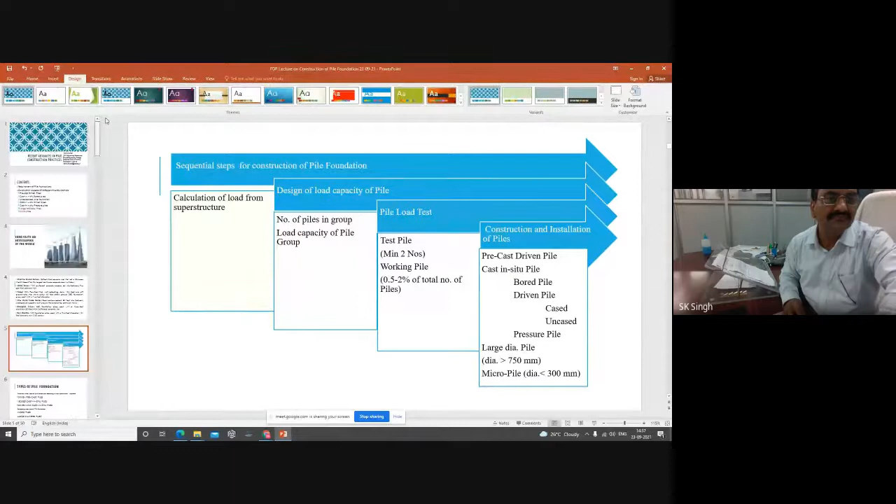Is it visible to you? Is the screen visible? Yes sir, visible sir. Okay, so am I audible and visible?

Yes sir, both. Okay, so we have to start a very interesting topic, that is the recent advances in pile construction practices.

So for this, during this presentation, I will deliver regarding the requirement of the pile foundation, and mainly we will focus on the construction aspect of the different pile foundations.

There are, as you know, different types of pile foundations: precast driven pile, cast in situ bored pile, under-reamed pile foundation, cast in situ driven pile, cast in situ pressure pile, and two more types of pile - large diameter pile and micro pile. These are the recent advances.

Mostly nowadays we are using the large diameter pile.

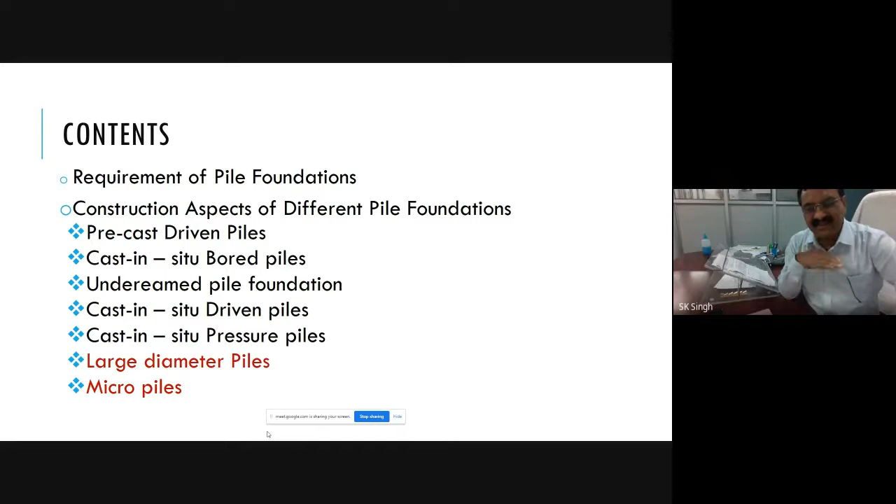In addition to the conventional pile, we will first go through the conventional pile, then focus on the large diameter pile and the micro pile, which are nowadays being extensively used in practice. So these are the recent advances in construction technology of pile - either we are using too large a diameter pile, or too small, which we call the micro pile.

So now why is that the requirement? Because if we talk about the construction of buildings, the height of the building is going on increasing.

So as the structure becomes taller and taller, the load on the foundation increases. The more the load on the foundation increases, the load capacity of the foundation member should be very high.

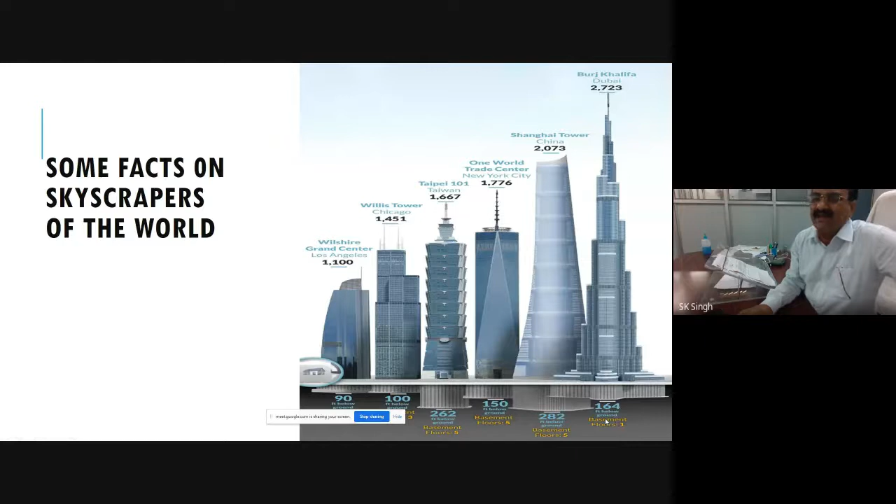So you can see here the dimension of the foundation - the depth of the foundation is 164 feet below the ground for the Burj Khalifa, and the type of foundation provided is the piled raft, meaning a raft foundation supported on piles.

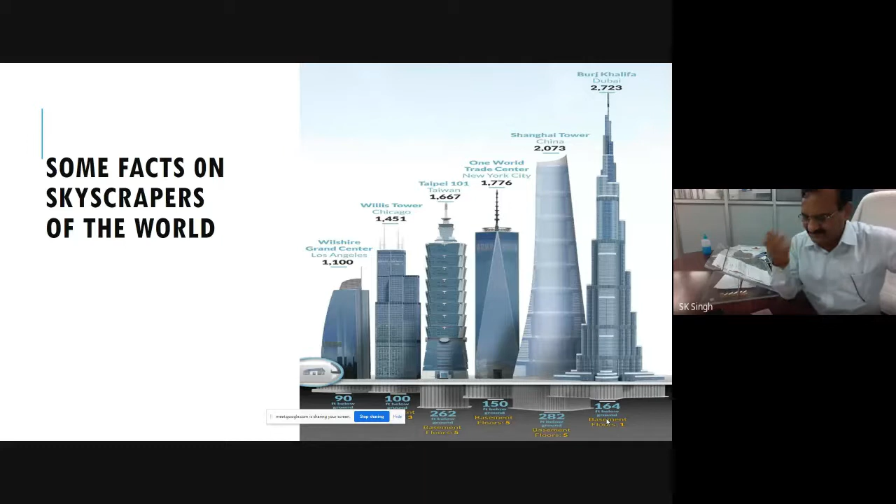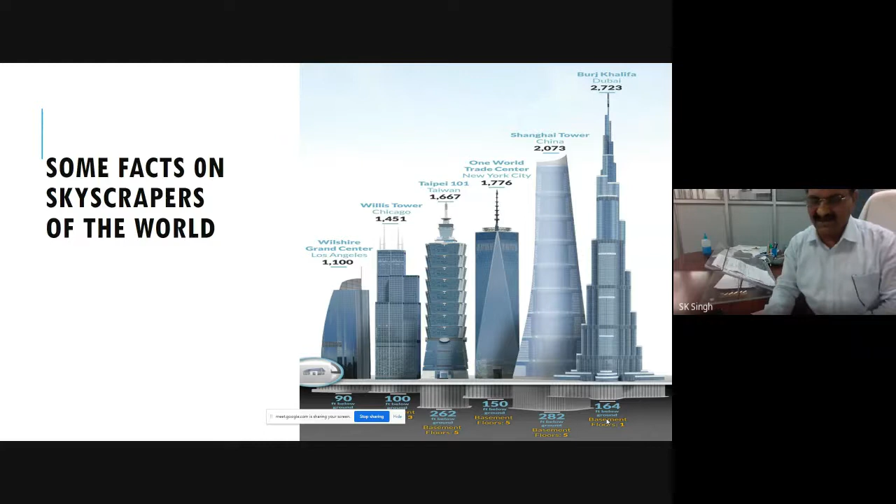Please don't hesitate to make any query or express your concern regarding this lecture. That's why we require a foundation which can take larger and larger loads, that is, large diameter piles are required.

These are some descriptions of skyscrapers. In the Burj Khalifa, which is 160 stories, 192 foundation piles are used, and each pile has a diameter of 5 foot, which is around 1.5 meter dia, with a 12-foot concrete mat, that is the raft foundation. So the raft foundation is supported on the pile foundation, that's why it is called pile raft. All these skyscrapers are supported on pile foundation.

Now what is the sequential construction of the pile foundation? If we have to design the pile foundation, how do we proceed? First, given the superstructure, we have to calculate the load coming from the superstructure. Then accordingly you have to design the load capacity. You have to fix the dia and depth of the pile. Depth of the pile can be fixed from the site investigation report, and the dia of the pile is to be fixed.

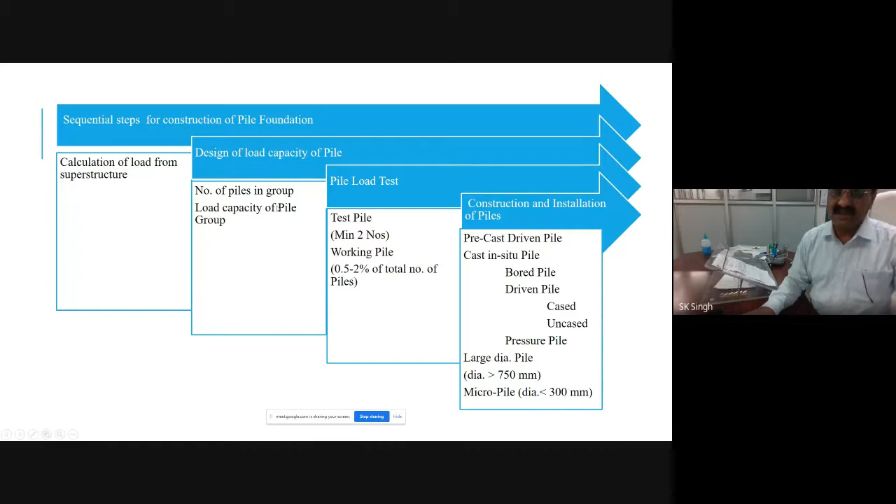Then you have to find out the load capacity of a single pile, using the static formula. Based on that, since you know the total load coming from the superstructure, you could find out the number of piles in a group, and then the load capacity of the pile group considering the interference among the piles.

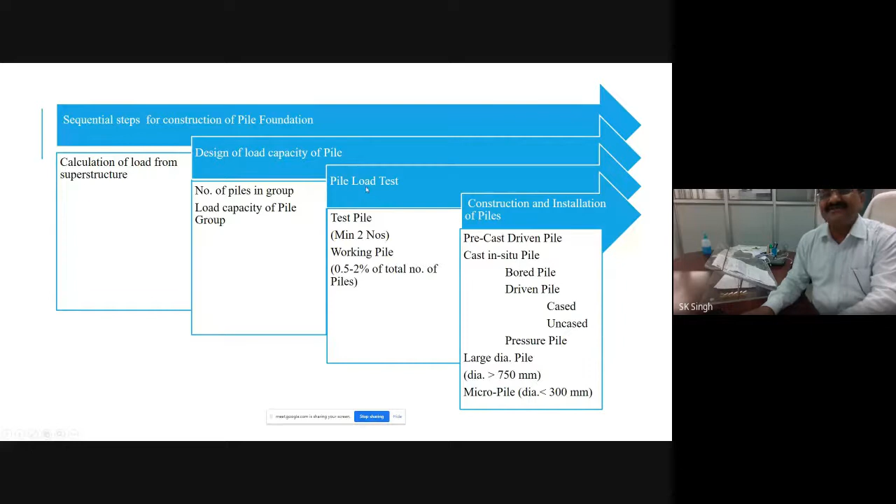That is the theoretical calculation. Since we don't rely solely on theoretical calculation, we do a pile load test before actual installation or construction of the pile in the field. There are two types of tests. One is called the initial test, conducted on the test pile. A minimum of 2 initial pile load tests should be carried out, and if that shows good agreement between the theoretical load capacity and the pile load test result, then you can go for actual construction of the pile.

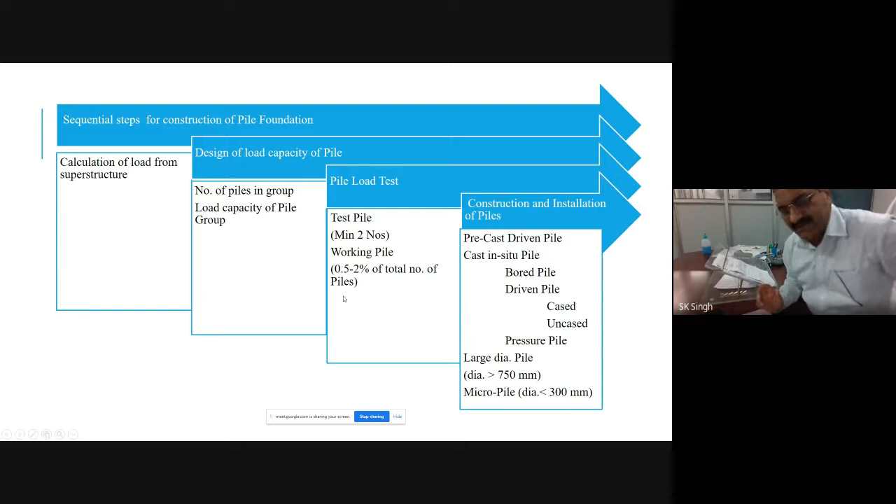In between, when construction of the pile has started, you have to do routine tests on the working pile. This routine test on the working pile may vary from 0.5 to 2% of the total number of piles required to be installed at that site.

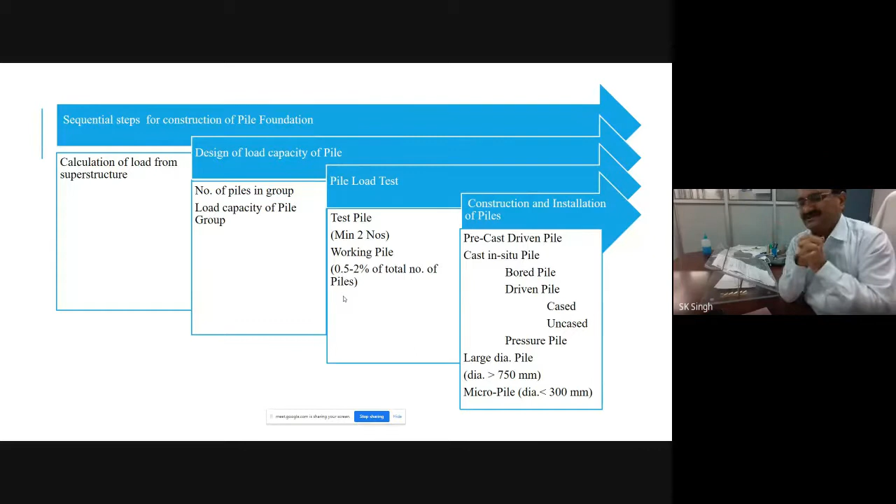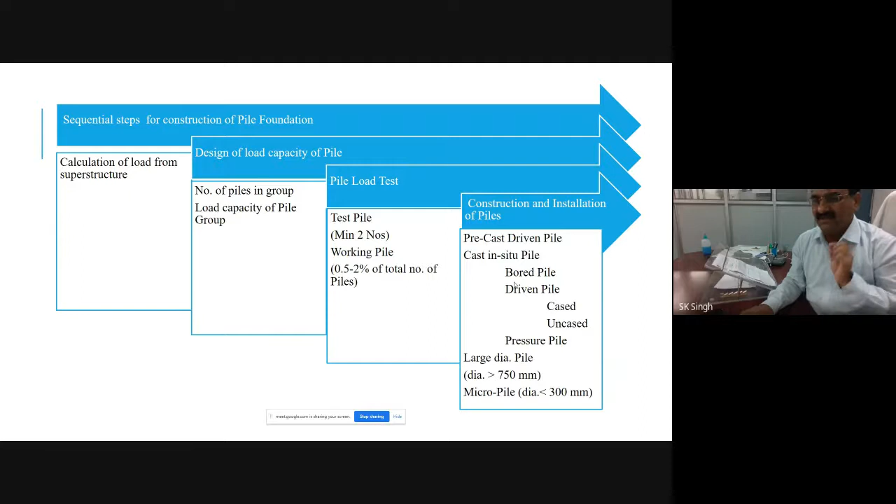So then construction is to be started, and construction is very important, because if your design is all right and your tests qualified the theoretical result, then if you maintain proper quality control during construction, it will take the required design load. But if there are variables in pile construction and good practices are not followed, the load capacity may get reduced, and the pile could not provide the support for which it was supposed to be designed.

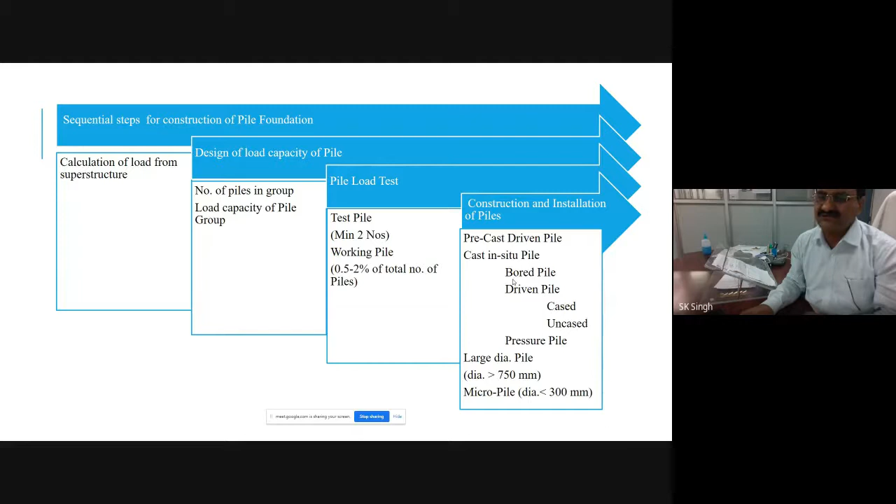So the construction aspects of the pile are very important, and that's why in between we check this load test on the working pile as a routine test, and these working piles become an integral part of your pile system.

There are different types of pile methods based on the method of construction. General pile types include the precast driven pile and the cast-in-situ pile, which may be a bored pile or cast-in-situ driven pile, cased or uncased. There is the pressure pile, and among these, large dia piles, as we have discussed, are greater than 750 mm, while micro pile is a pile having dia less than 300 mm.

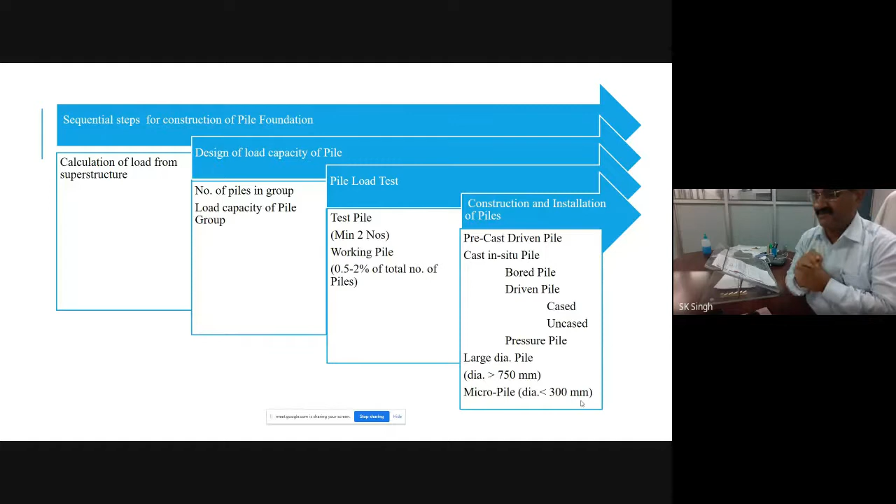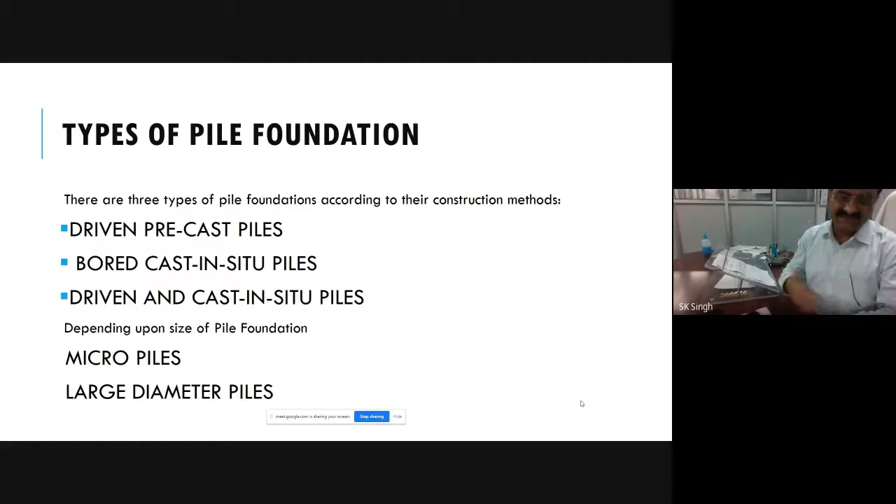Now where can micro piles be used? Micro piles are very thin piles, and they differ from conventional piles in where they can be used. Suppose you have to install a pile at a mountainous terrain where the pile installation machinery cannot be accessible, and heavy machinery cannot arrive at this very rugged terrain. In that case, we use the small dia pile, which requires a very handy type of installation equipment.

Similarly, if there is not sufficient headroom for installation, like the retrofitting of a structure, micro piles can be used because they are easy to install. But the load capacity of the micro pile is comparable to the conventional pile. Though they are very thin, the diameter may vary from 75 mm to 300 mm for the micro pile.

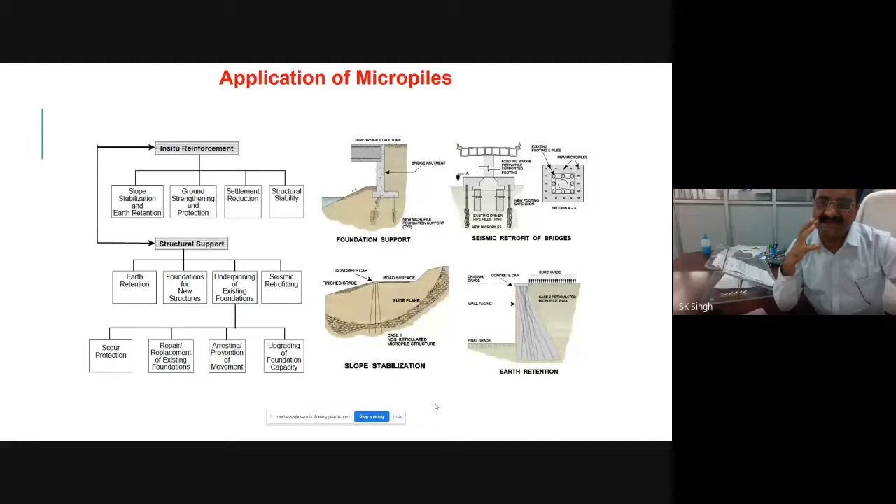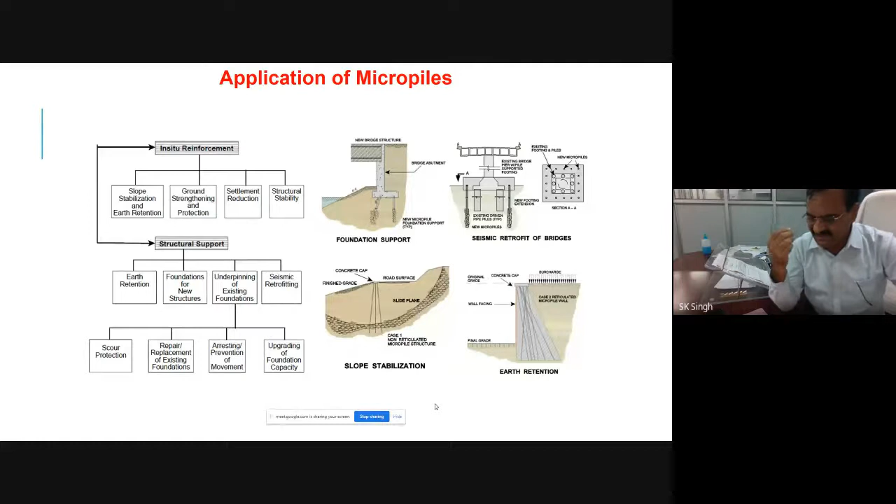If we compare the micro pile with the conventional pile, in the conventional pile we pour concrete under gravity from the tremie pipe. But in the case of the micro pile, grouting is done, and the degree of reinforcement is very high. So even the small dia pile's load capacity is comparable with the conventional pile.

On the contrary, large dia piles are also used. We have seen that it has found use under skyscrapers, because the load on the foundation is increasing due to the exponential increase in the height of buildings. So that's why we use large dia piles to sustain that load.

Now you might have seen the construction of flyovers and road over bridges. Under that, to take the load under the pier, these large dia piles are installed, or it may be in a group of piles. If we talk about river bridges,

where the foundation is to be provided on the erodible bed, earlier the invariable choice was the well foundation. But the construction and sinking of the well was very tedious, because the well foundation is installed through sinking under its own weight. That sinking process is very tedious, and particularly to sink that well foundation in plumb is a very difficult task. Generally there will be tilt and shift in the well foundation, and that is to be rectified during the sinking operation.

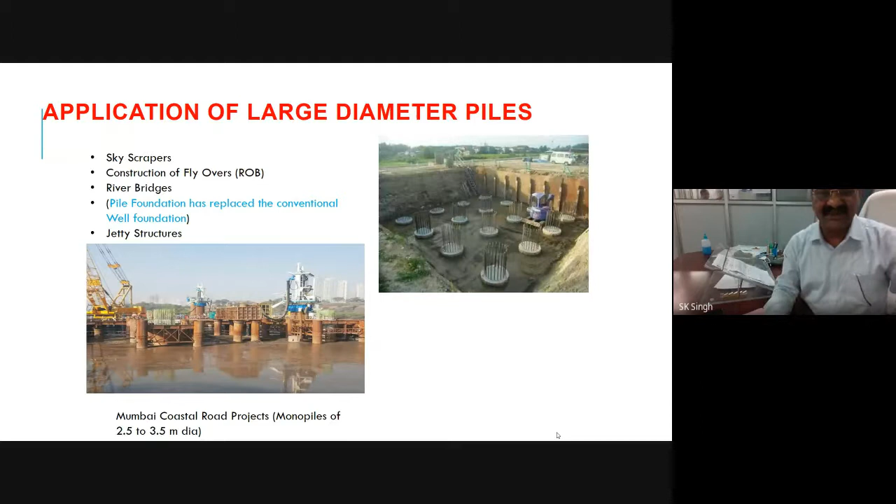So just we are going through the construction process of the different types of pile foundation. First is the pre-cast pile, that is casted or fabricated in some factory shop, and then it is brought to the site, and then it is driven under the impact of the hammer.

Here, one point is that lifting of the precast pile is done from 2 points.

Oh, Rajendra, the sound is coming through. Sorry.

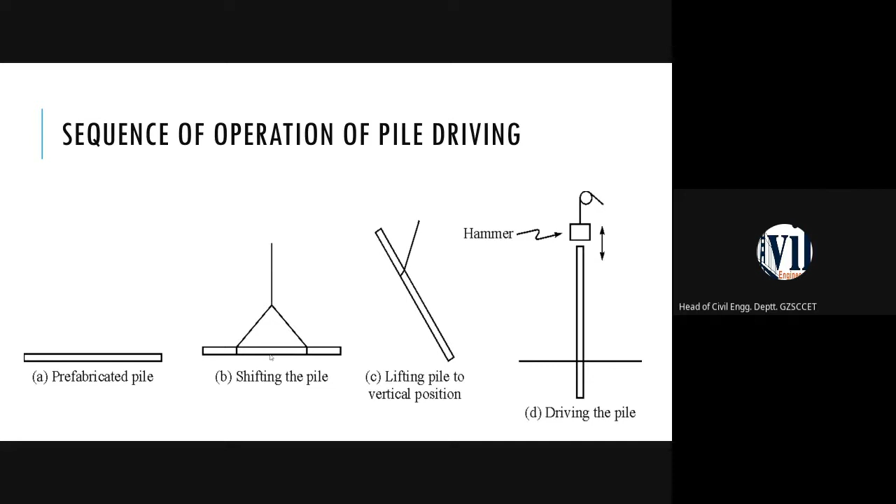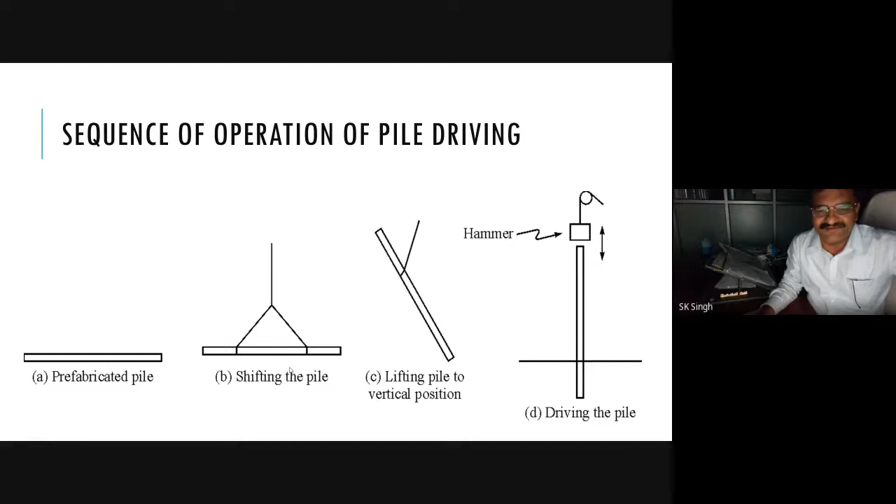No idea, sir. No idea, because... Okay, oh sorry, the light had gone. I'm not able to hear your voice.

0.2 L... point two... 0.207 L. So that is the overhang.

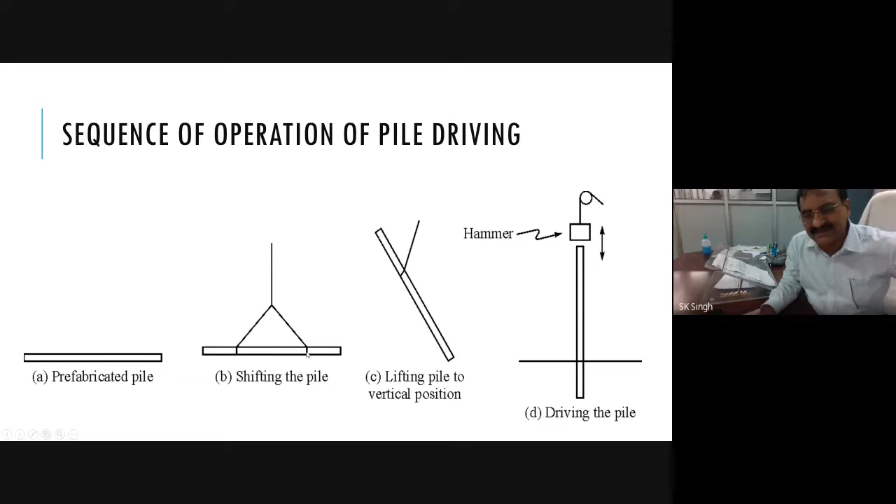That's why in the precasted pile there are grooves, there are hooks fixed at this position, so that the laborers are forced to lift the pile from this position only, so that there is minimum handling stress.

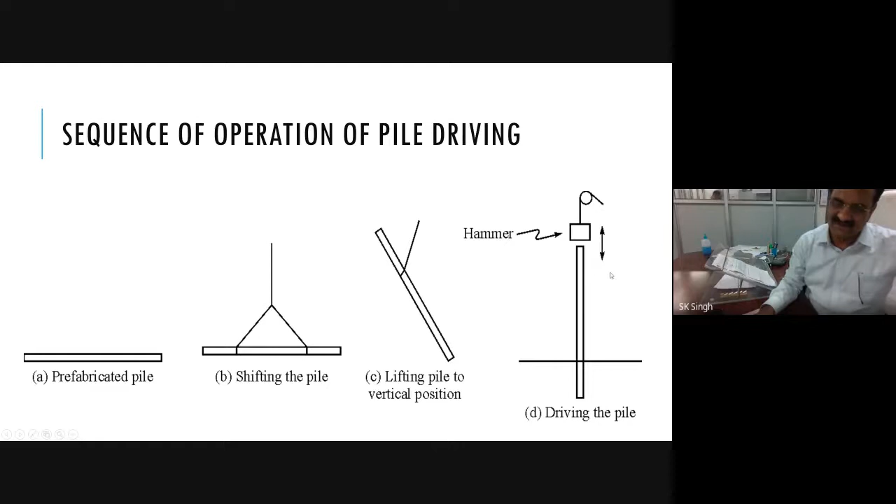And then for this hammer, there are different types of hammer you might be knowing. One is called the drop hammer, another one is called the pneumatic hammer.

The hammer is lifted under pressure, and in its downward journey there is pressure also applied - that is called the double acting hammer. And when the pressure is applied during only one stroke, during the lifting of the hammer, then it is called the single acting hammer.

Nowadays the vibratory hammer is used, for which the free fall is smaller than these two hammers. Here there are eccentric weights rotating in counter directions, making a pulsating effect that creates vibration, and that impacts the pile head.

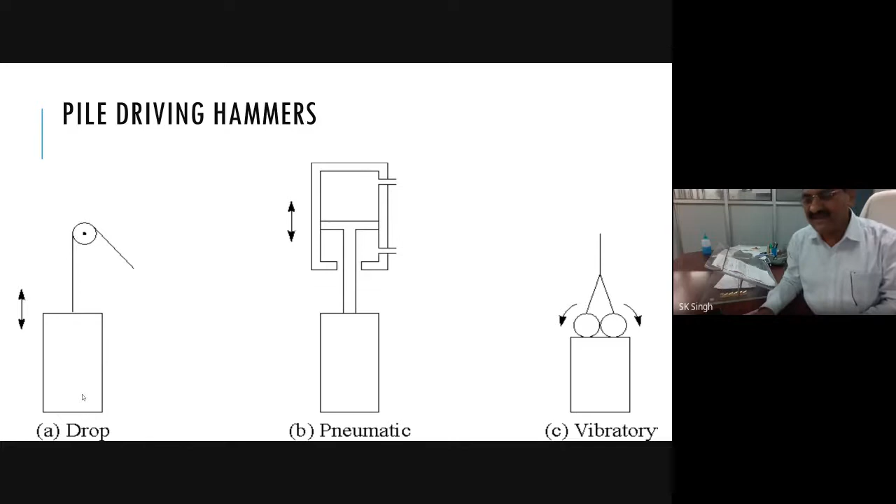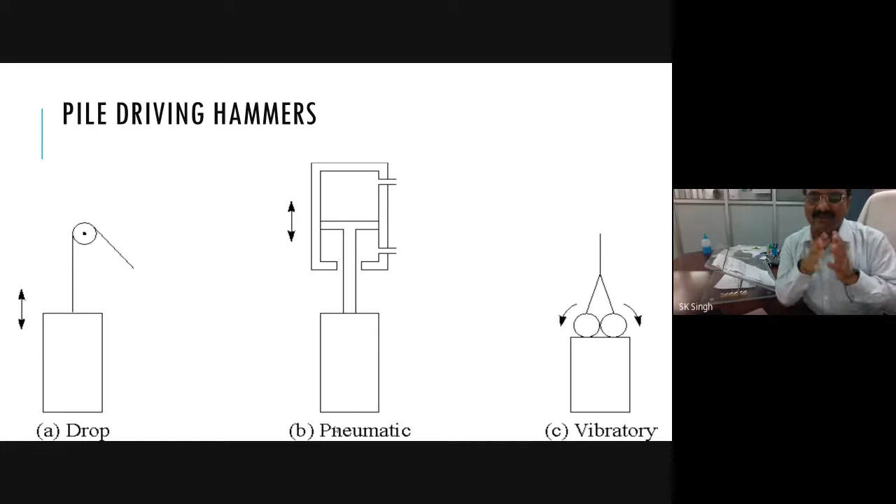So nowadays mostly the vibratory hammer is used, because in the case of the drop hammer, the impact on the adjacent area is very high, and pile driving makes very heavy noise. So particularly it should not be installed in habitated or built up areas where there are a number of adjacent structures, because it can jeopardize the safety of the adjacent structure.

But if you are driving the pile with the vibratory hammer, it will give the minimum disturbance among all these choices of hammer.

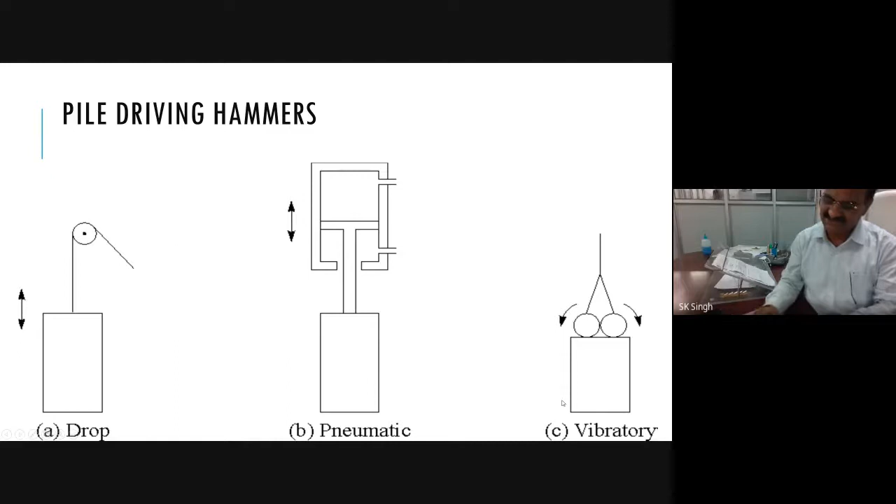So you may be aware what the theoretical approach is by which, under the dynamic formula, we find out the safe capacity of the driven pile. Do you know? Can you tell me? Anyone of you?

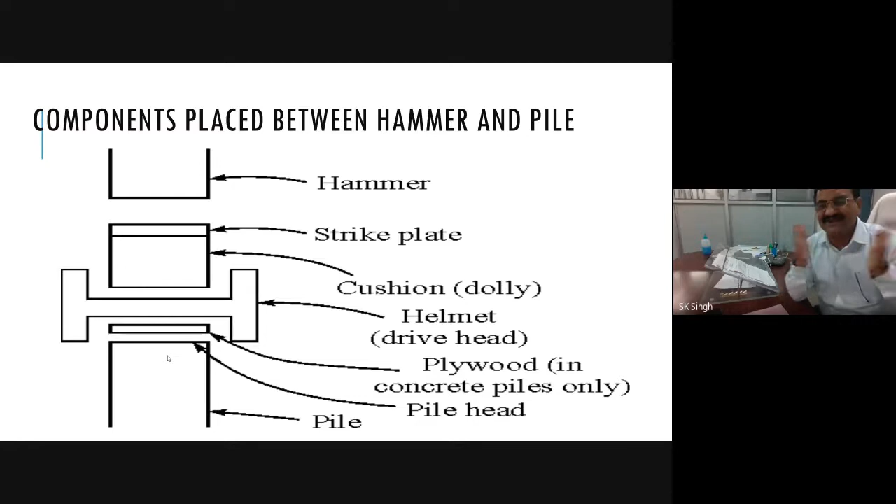There are so many absorbing materials here to protect the pile. Also, there is dissipation of the energy of the pile in terms of sound energy, in terms of heat energy. So there is a lot of dissipation, and only a very small fraction of the hammer energy is being utilized in driving the pile.

Is it clear? Am I clear? Yes sir. So that's why this formula is useless, if you are using a factor of safety as high as 6, so that has no meaning.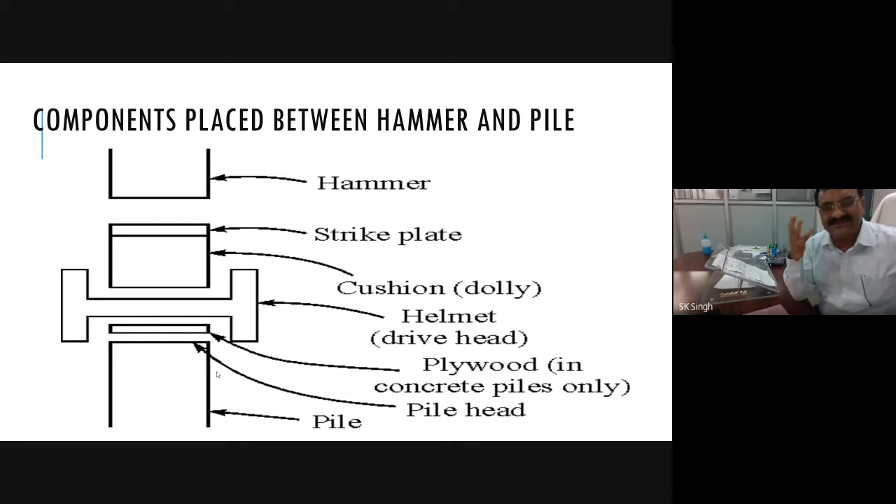That's the limitation, the energy of the hammer is being dissipated in many ways. In the precast pile, generally it is difficult to alter the length of the pile, but in the steel pile we can make it, this can be socketed, and this is the joint, and this can be welded, whereas in the concrete pile it is not possible.

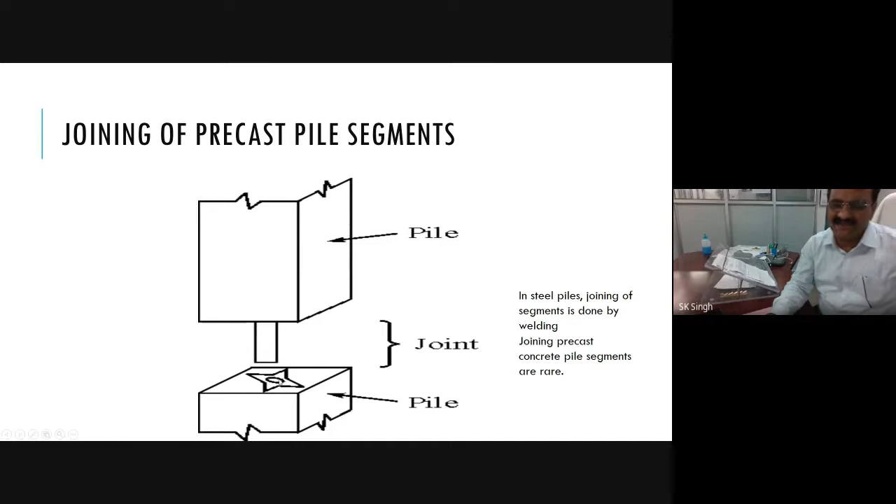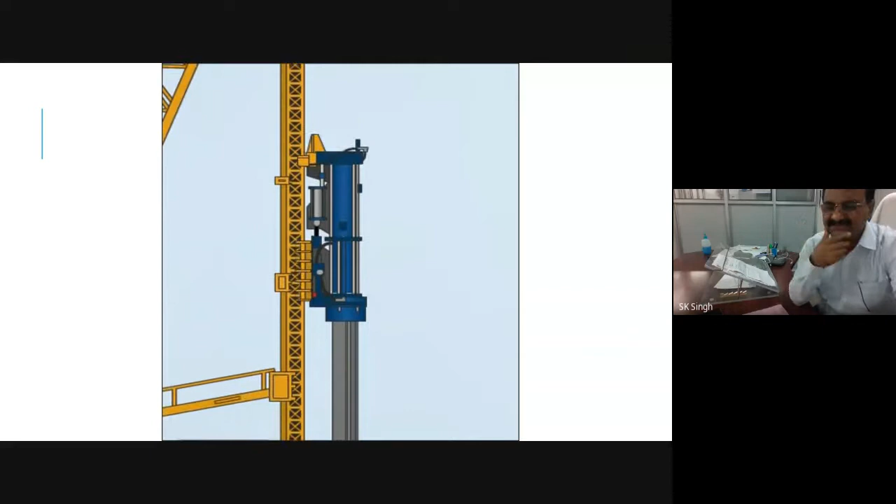Just I want to show a pile driving animation video, where just with the impact of the hammer, it is being driven into the ground. This is the mast, with support of which this pile has been erected vertically and is being impacted with the hammer, and it is driven into the ground.

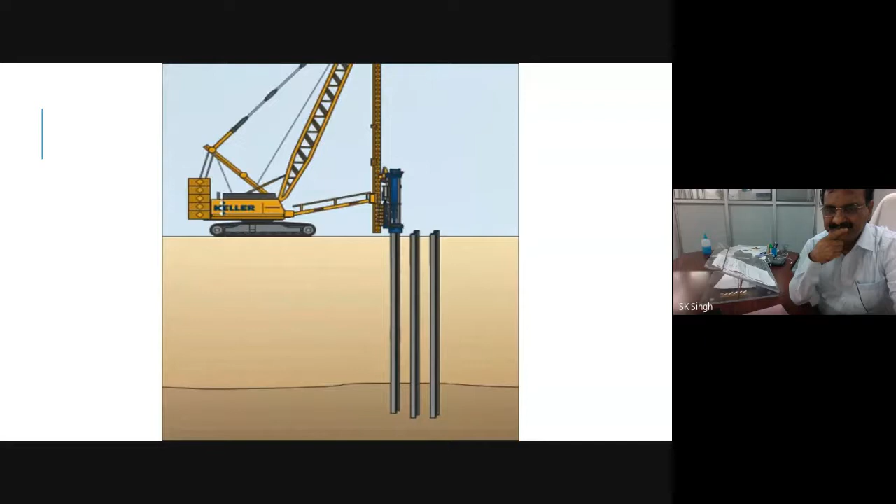So this driven pile can be used in many ways. The advantage of the driven pile is it can be used in most ground conditions, and this could be cost effective, with an extensive range of pile size, but the length of the pile will be limited because this has to be transported from the fabrication site to the actual site where the pile is to be used.

So on account of the transportation, the length is limited. This is cost effective, there is better quality control in the construction of the pile as it is made in the factory, and there is fast installation because this is hardened concrete, whereas when we make the bore pile, that requires time for setting. Only then you are able to construct the superstructure over it.

The disadvantage is the limited length, generally not more than 20 meters because it has to be carried. There will be noise nuisance due to impact of the hammer on the pile head, disturbance to adjacent structures, all of which I had already explained, and it is difficult to alter the length.

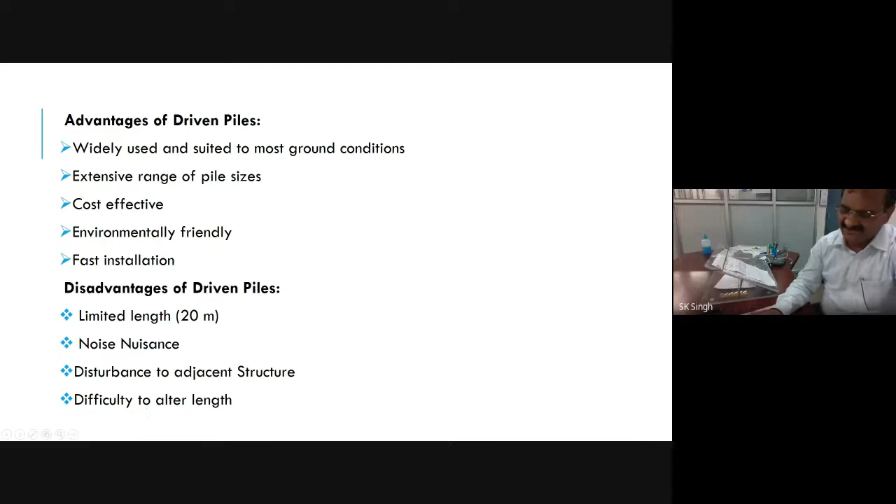In case of the bore pile that we make, first we drill the bore hole, then we put the reinforcement cage, and it is installed by removing the soil.

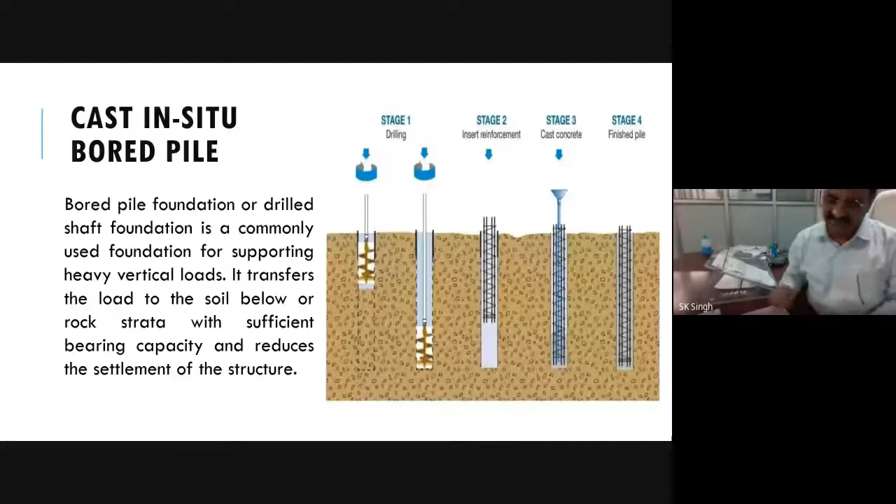Cast-in-situ bored piles are called replacement piles. The soil is first removed and then concrete is poured in its place. So for making the bore hole in which the concrete is to be poured, there are different types of equipment used.

These are the drilling rigs - this is the helical auger, this is the bucket, this is the bailer. This is mostly used in clay soil and this is mostly used in gravelly soil.

There is a flap that can be opened while you are lifting this. When it gets filled with the cutting material, it comes into the closing position, so the material is retained in this bailer and will not fall down. When you drop it again, it will open and all the cutting material will go inside.

This is the grab, like a clamp style. This is the trench cutter, mostly used in the construction of the diaphragm wall.

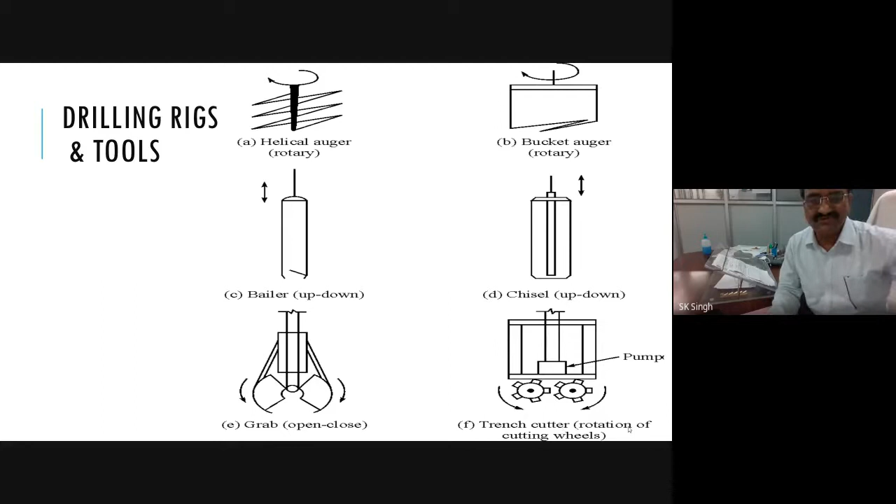If more quality control is needed, then you can use the telescopic Kelly bar, so you can monitor the verticality or the plumb line of the borehole, because your borehole should be truly vertical - there should not be any eccentricity, otherwise there will be eccentric loading on the pile.

That is one of the reasons piles are seldom used singly. But now, with the advent of construction technology, we are able to monitor the pile to greater accuracy while making the borehole, using the telescopic Kelly bar, and we are able to make the borehole truly vertical, so now we are able to use a single pile only.

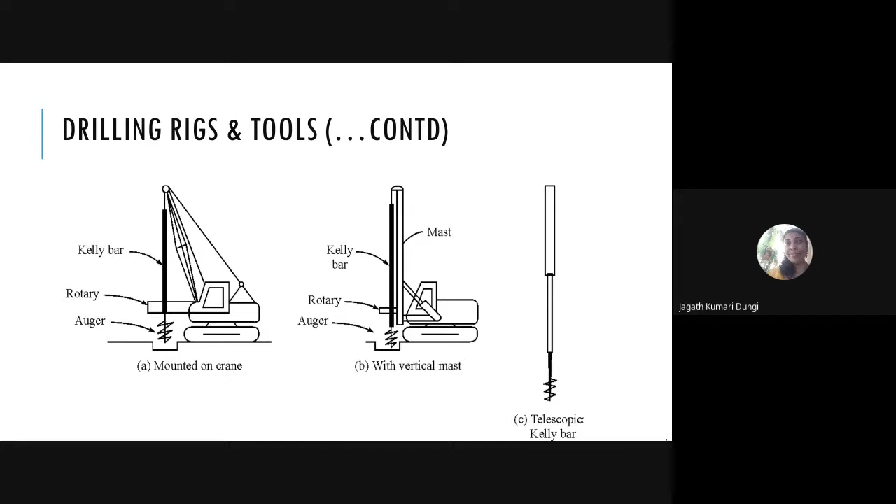Am I clear? Yes sir, yes sir. Are you getting bored? No, sir. No. Oh okay, good, fine - then I am also interested.

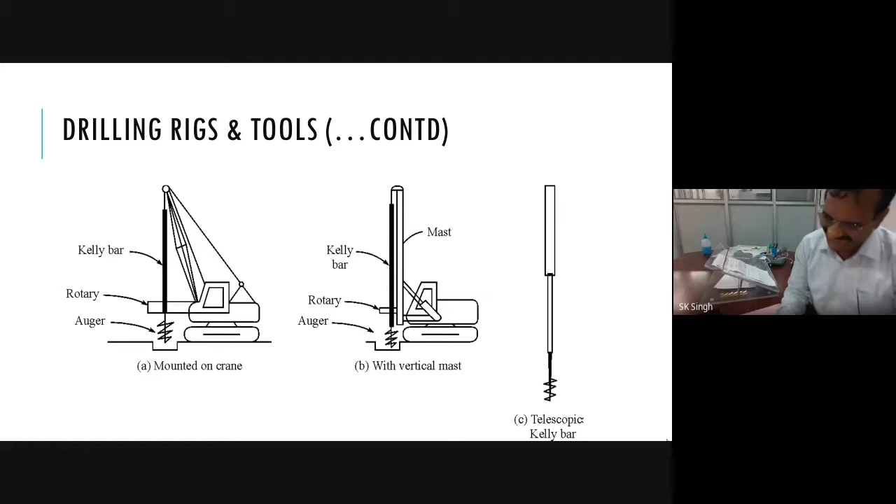Now, when we drill the hole, sometimes what happens is that if the soil is clayey type, cohesive soil, then it does not require any support at the sides and it will remain intact, so you can go on augering till the required depth.

But in some soil, particularly when you reach the water table, you have to make the borehole below the water table, or if the soil is cohesionless, in that case your bore will not remain intact - it will collapse. So it will require support, either some external support in the form of a hollow casing, or some other means like bentonite slurry.

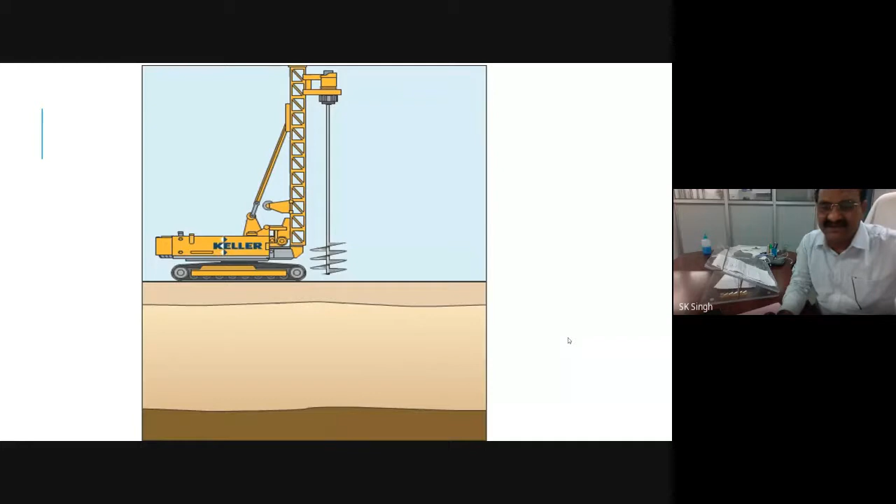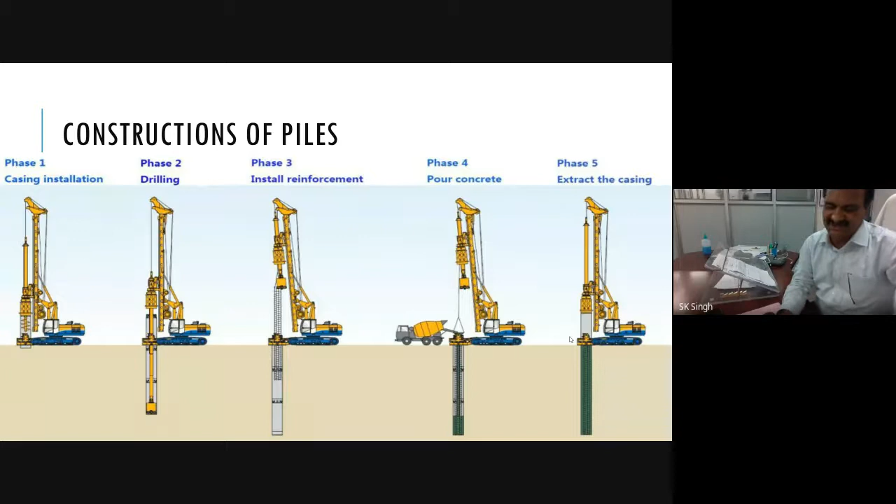But it will take time to set the concrete. Unlike the driven pile, which can be used just after installation, this will require time to set the concrete. Then you can make the next construction over this foundation.

So this is again circulated. That will save water also, and it will keep the bentonite in circulation until we reach the desired depth.

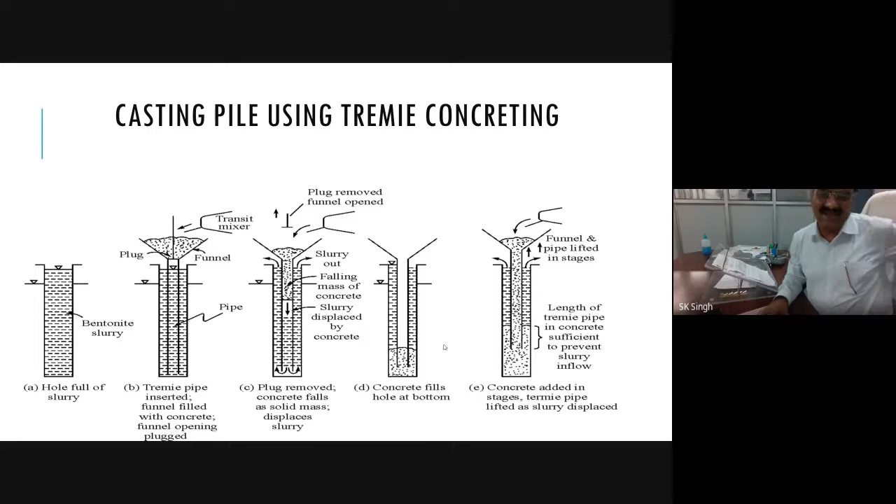In this process, the bentonite slurry will come upward as the concreting gets deposited. Only the concrete layer forms as you lift the tremie pipe, and concrete gets deposited while the bentonite slurry comes out. That is the process, and it has been depicted under these different stages.

In the case of the under-reamed pile, mostly used for expansive soil, there is need for construction of the shaft of uniform diameter, and in the under-reamed pile, there are bulbs of larger diameter. It may be one or two.

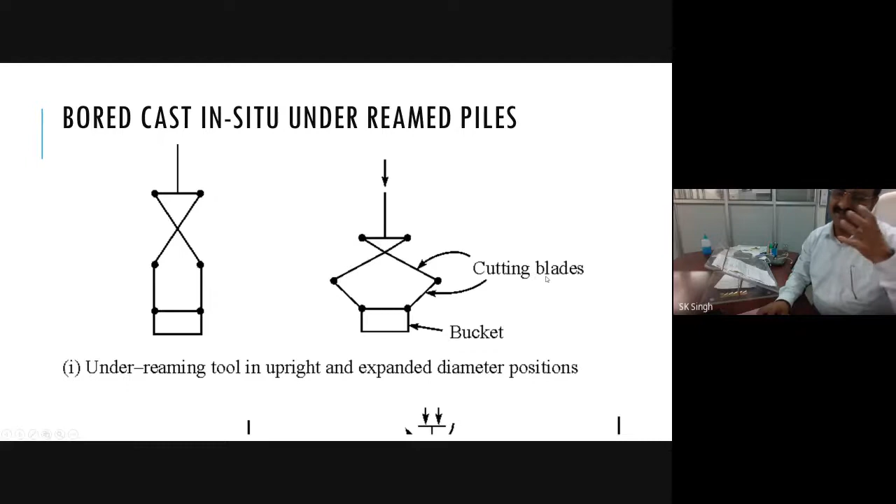There is a bucket attached to it, so all this cutting soil will fall into this bucket. When the bucket gets filled up, you lift it up from the borehole and empty it. You drop it back in the borehole till you make the bulb of the desired diameter.

So this process is again shown schematically here. That was the hole drilled with a uniform shaft. You had lowered this under-reamer in the upright position. At this level, we need the under-reamed bulb, so it is rotated and pressed simultaneously so that it opens and the diameter becomes larger. At the same time it is rotated so it cuts the surrounding soil, which goes into the bucket, and finally you get this shape.

So that's why the under-reamed pile foundation is constructed. Here is the final shape of the under-reamed pile foundation. You can see there is one under-reamer, and this is the two under-reamer. The depth of this under-reamed pile is generally 3 meters to 3.5 meters, and it can be one bulb or two bulbs.

The diameter of this is the enlarged bulb, and this is the stem. This diameter of the enlarged bulb can be 2.5 times this diameter. This is the diameter D of the stem, and Du is the diameter of the enlarged bulb. Du may be 2.5 to 3 times D. There will be an air gap so that there is provision to expand the soil. That is how it is constructed.

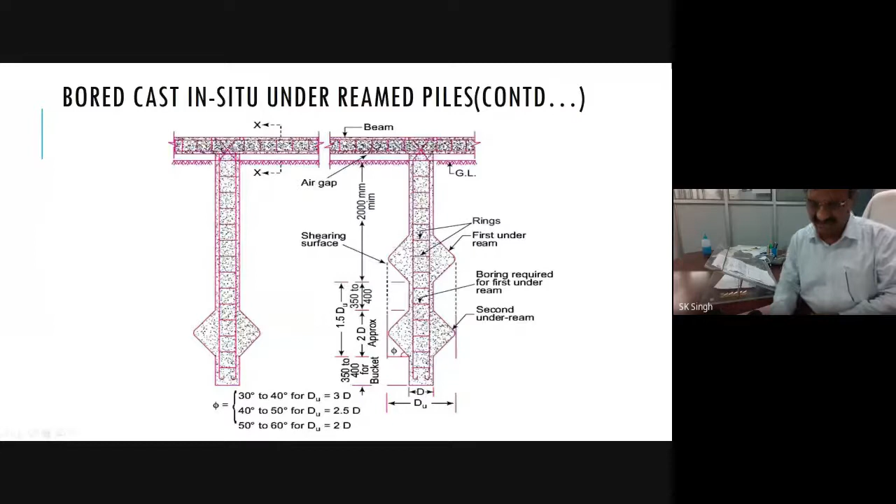Mainly we are dealing with the construction part, so we will not go into much more detail because we have to cover many other types of piles.

Now, what is the driven cast-in-situ pile? Have you heard of the driven cast-in-situ pile? What is it? Can anyone tell me about the driven cast-in-situ pile? One we had discussed was the precast driven pile. Now it is the driven cast-in-situ pile.

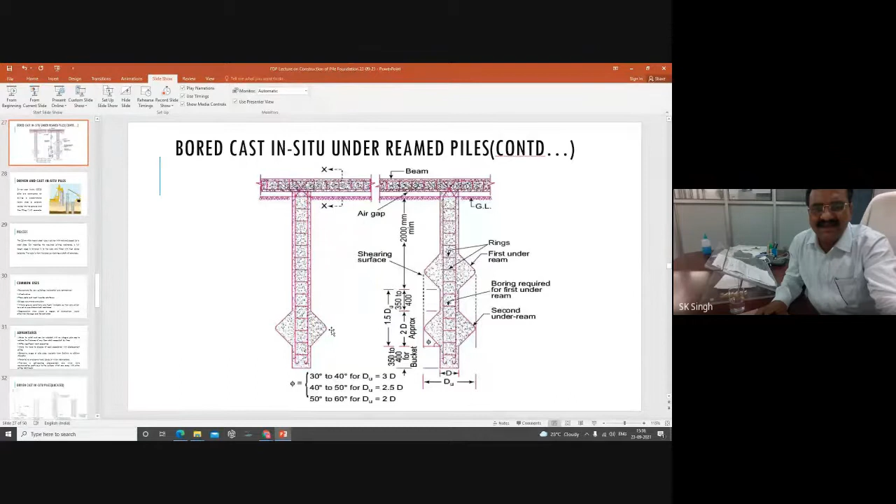Okay, so we were talking regarding the driven cast-in-situ pile. So that is how I had explained this. These are the common uses. There are various advantages listed here. It is in between the driven and the bored pile.

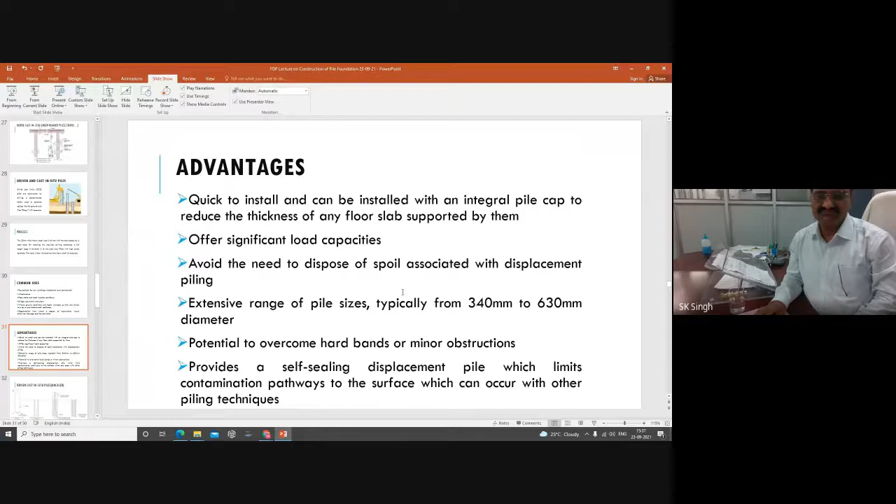So now, I had explained to you that the driven cast-in-situ pile may be of two types. One is the uncased pile and another is the cased pile.

So here what we do, you see this is the casing, a hollow casing, and at the bottom of this casing a detachable shoe is attached, and this casing is driven into the ground. So when this casing has reached the desired depth, the reinforcement cage is provided in it.

You pour the concrete through a tremie pipe, and the casing is gradually pulled up. This shoe will remain in position since it's a detachable shoe, so you can pull the casing out. As the concreting is being done, this casing is pulled out, and when the concreting reaches the ground position, this casing is totally pulled out, and this is the wavy surface you will get in the ground.

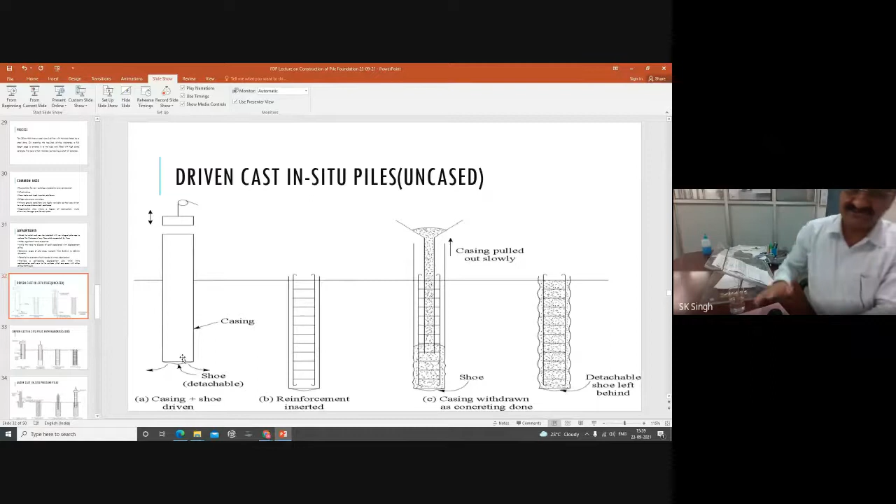In the case of the uncased pile, there was only a casing and a detachable shoe. This casing was driven, and after that the casing was taken out, so it remained uncased, and only the concrete surface remains.

In the case of the driven cast-in-situ pile, there is a thin steel shell, and it has been driven with the help of a hammer. So the shell and mandrel are both driven, and when it reaches the required depth, the mandrel is taken out. Then the reinforcement is inserted and concrete is poured.

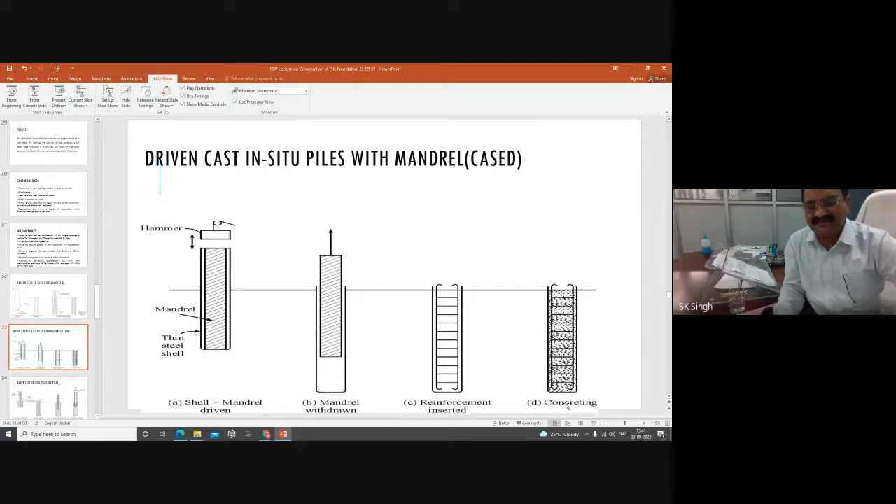These are mostly patented processes. All these driven cast-in-situ piles are patented under the name of some company, like the Franki pile, the Franki tapered pile, MacArthur concrete pile, Simplex concrete pile. These are all driven cast-in-situ piles patented under company names. Their processes differ from each other, and for a specific process you have to consult the literature and books. But all these processes have been patented, giving rise to different types of piles.

In the case of the auger cast-in-situ pressure pile, these piles are very rarely used, but it's again a type of this process. There will be a hollow drill rod, and we drill the hole up to the desired depth. Then concreting is done through this hollow stem. What is the difference here? We had not put the reinforcement cage here, but at the last stage the reinforcement cage is driven with a vibratory hammer while the concrete is still green.

So here we had not put the reinforcement first; then we poured the concrete. First the concrete has been poured, and while the concrete is still green, meaning less than initial setting time, the reinforcement cage is driven. This can be used for short lengths of pile, and so it is called the pressure pile, where the reinforcement cage is driven into the green concrete.

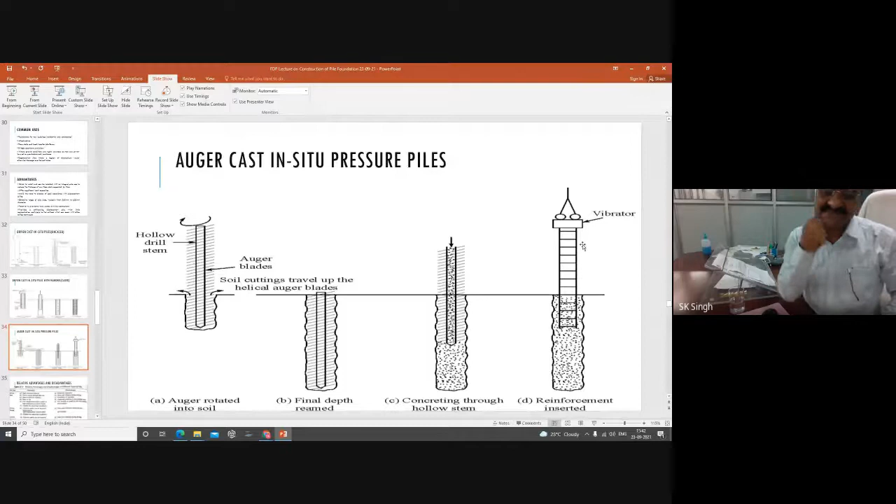There are different advantages and disadvantages of the pile. Mostly I had already explained, so you can go through it. Now, in the case of the large diameter pile, bored pile, large diameter piles can be easily constructed, so I am skipping that.

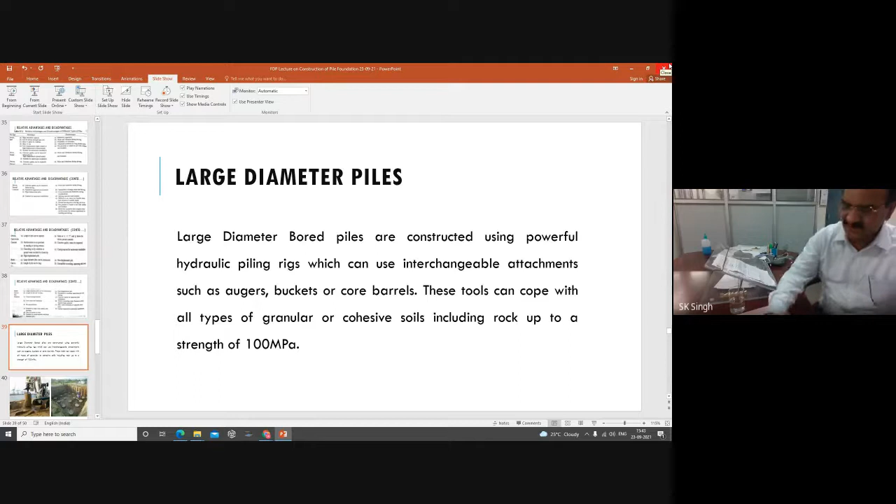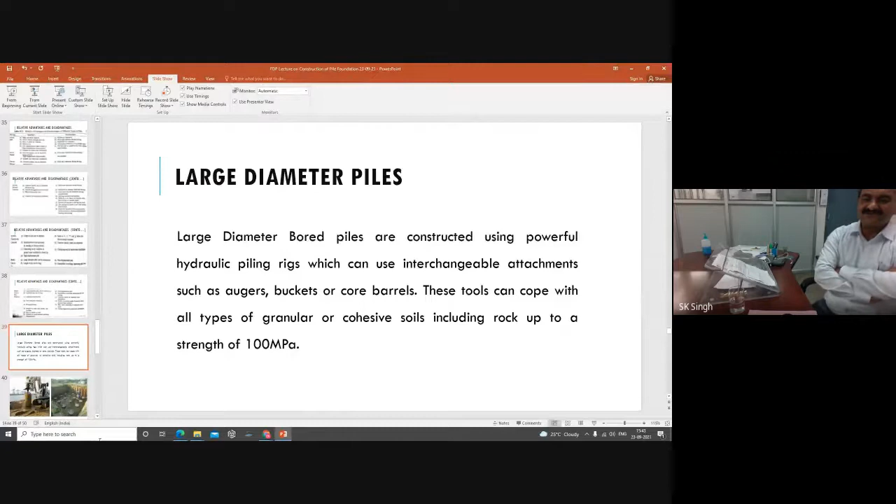Generally the diameter varies from 1 meter to 2 meters, and it can be as high as 3.5 meters in diameter. I had shown one photograph from the coastal area of Mumbai. These are the drill rigs of high diameter, and we can make the hole in any strata of soil very easily, and that's why this is the preferred method to install the large diameter pile.

On the contrary, we are using the micro pile, and these micro piles are also known as mini pile, pin pile, needle pile, root pile - different names have been given. Here the diameter varies from 75 mm to 300 mm. For conventional pile, the diameter is greater than 300 mm, generally starting from 450 mm and up to 750 mm. So this is a very small dimension, a small dia pile.

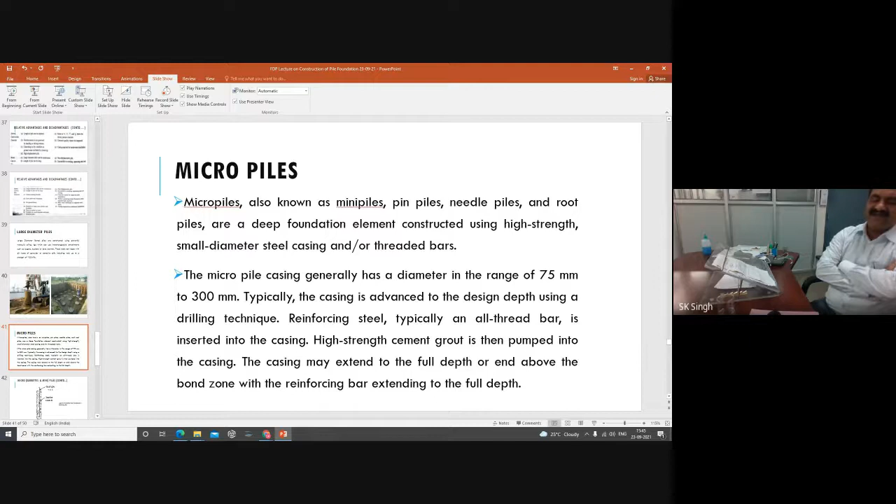Here the reinforcing steel is provided in form of hollow steel, or it can be a threaded bar that is inserted into the casing, and high strength cement grout is then pumped into the casing. Normal concrete is not used in the case of the micro pile. There, high strength cement grout or cement sand grout is used, and that develops a good bond zone with the reinforcing bar and the adjoining soil, deriving very high strength. Despite the small dimension, the load capacity of the micro pile is well comparable with the conventional pile of larger dia.

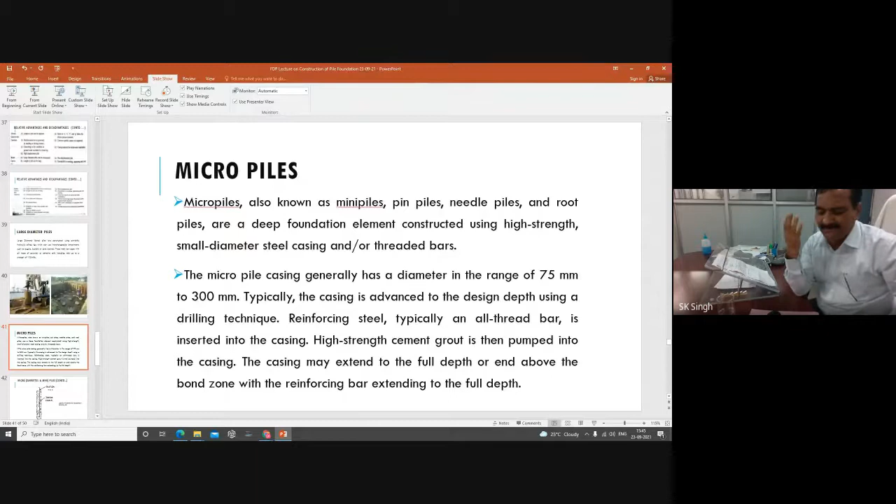unbonded zone. Below that there will be a strong layer in the weak soil, because in the weak soil, when you apply the grout under pressure, it will go into the voids of the surrounding soil. So you go on applying the pressure, you go on applying the grout, and it will go into the adjoining soil - it will not form your pile.

So that's why a casing is inserted, so that it can be limited to your pile area. And when there is a strong layer, in that case the casing is not required, and that is called the bonded zone. Because in the zone of weak soil, when you apply the grout pressure, it will go into the surface voids of the adjoining soil. That's why we had to provide the steel casing.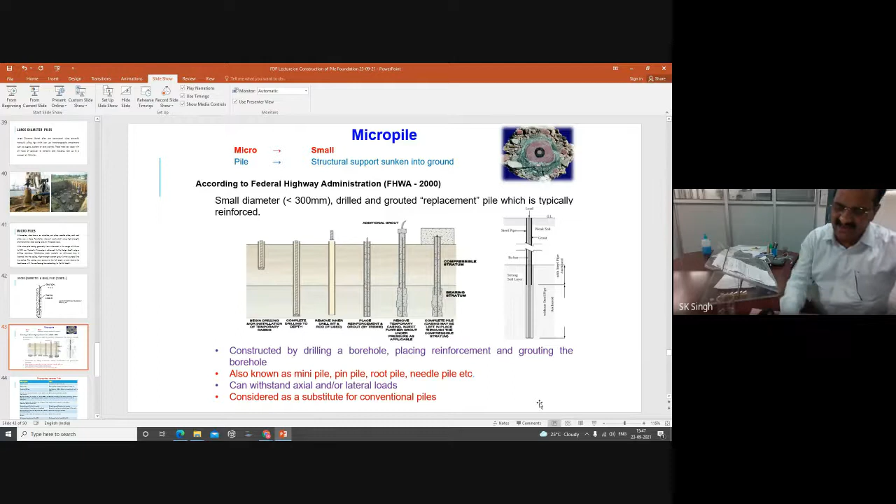This can withstand high axial load and lateral load, considered as a substitute for the conventional pile, and within limited or inaccessible areas it can be used. These are the

differences between the micro pile versus the conventional pile. This is always circular, with diameter less than 30 centimeters. Here the grout using cement sand mortar or neat cement slurry under pressure is used. The pressure can range from 1 bar to 3 bar, depending upon the situation. Generally 2 bar pressure is used. The concreting is done without pressure.

Here there are different types of micro pile, classified according to design as case 1 and case 2, and due to the method of grouting there are different types A, B, C and D. Another point is that the main reinforcement may be more than 50% of the cross-sectional area in case of the micro pile. That's why it derives very high strength, and this design is governed through only the structural capacity of the pile, while in conventional pile the design is governed by the geotechnical capacity.

Here the tip resistance is neglected in the case of the micro pile, while the conventional pile derives most of its strength through skin friction, particularly for the friction pile. Here reinforcement is in the form of central steel bar, hollow tube, bundle of bar and steel casing. Here the reinforcement is only the steel bar, high tensile steel bar.

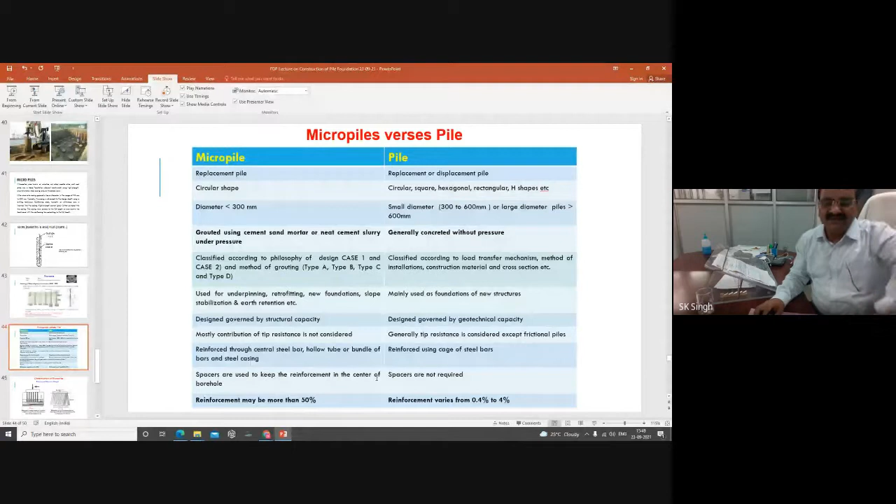Here spacers are used to keep the reinforcement in the center of the borehole, because a large dia reinforcement or tube is used, so a spacer is required to maintain the central position. Here spacers are not required. In this case the reinforcement is as high as 50% of the cross-sectional area. In the conventional pile the reinforcement varies from 0.4% to 4%. 0.4% is the minimum reinforcement for the bored pile, and 4% can be for the driven pile.

So these are again the further classification of the micro pile based on the design behavior. This micro pile can be used as a direct structural support. This is called the case 1 micro pile.

And when the micro pile is used to circumscribe and internally reinforce a coherent composite reinforced soil structure, it passes through the weak soil, acting as a root zone. You see the network of the micro pile inserted into the weak soil. Here the micro pile is not directly taking the load.

So that is called the case 2 pile. It is the case 1 pile when the micro pile is directly taking the load from the superstructure and providing support. It transfers the load to the competent strata, because it has passed through the soft layer and is resting there, deriving strength from this bonded zone.

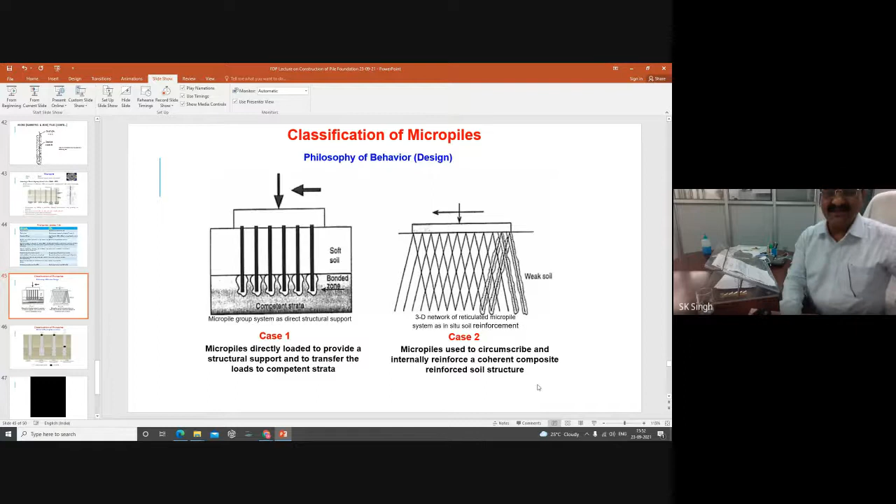Then again, on the method of grouting, there are different types of pipe. Initially we had seen the case 1 micro pile and case 2 micro pile. Now, how do you grout the pipe? There are different types.

If you are putting the grout under gravity only, with no pressure, this is the type A micro pile. When you are using pressure through casing, meaning an unbonded zone where you had inserted the casing, that is the type B micro pile, with a single global post grout. First you construct the micro pile without grouting, and then you apply the pressure. That is the post grout, called type C.

Only type B micro pile is extensively used. There are also multiple times when you pour the concrete, then apply the pressure, pour the grout, then apply the pressure. That can be done a number of times, resulting in the type D micropile.

This symbol has been shown as the pressure gauge. You see here the pressure gauge is absent, meaning the grouting is done under gravity. Here is the packer, after which you apply pressure two times. That's why it is called multi-repeatable post grout. After concreting, and after grouting, pressure is applied on the grout externally two times.

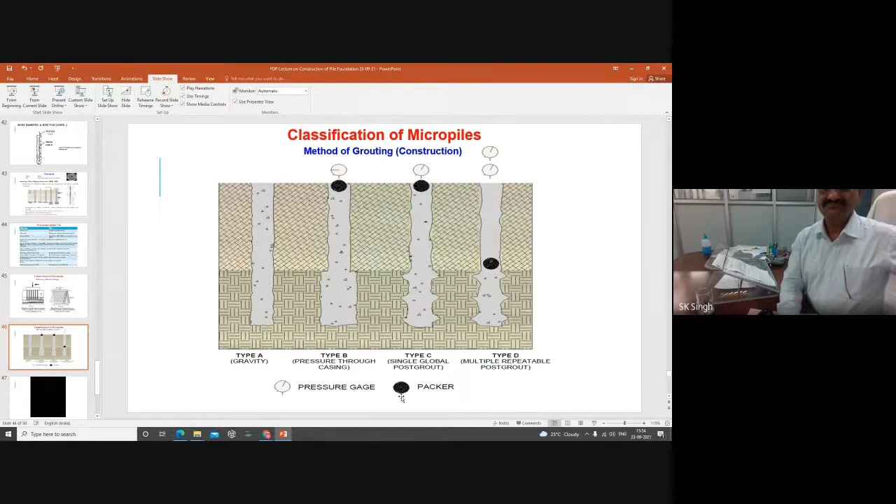These are common usages of the micropile that provide structural support to most structures, underpinning of the foundation, mass stability, and transferring the load.

It is capable of resisting compressive, uplift, tension, and lateral loads, and is used when transportation of heavy machinery is difficult and where there is limited access in that area.

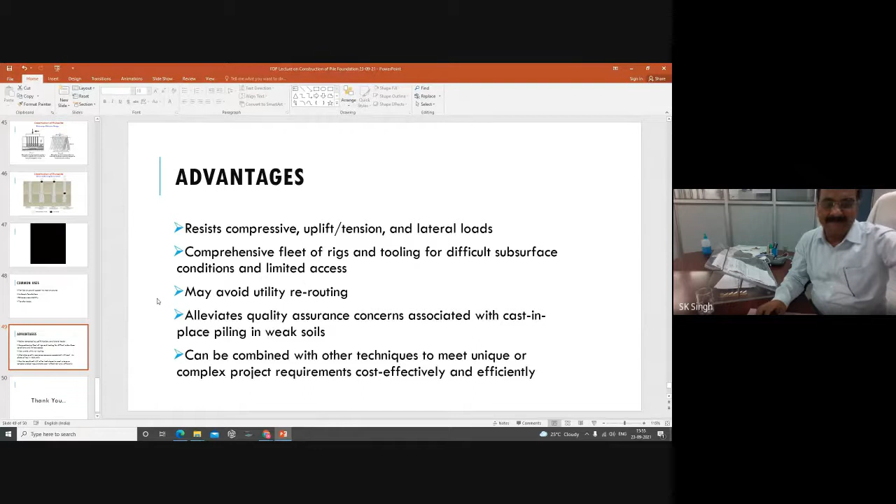Quality assurance is particularly important with cast-in-situ piling in weak soil, and it can be combined with other techniques to meet unique or complex project requirements cost effectively and efficiently. So there are a number of uses for the micropile, and its use has been gaining.

There was a video, but perhaps it is not working. I'll try to show it from other places.

Can you see it? Can you see it? The screen is visible, yes sir. Visible sir. These are the micropiles installed above.

This site is MSP4, and this is for construction of the snow gallery. This is the micropile that has been installed. So I can show you the other picture.

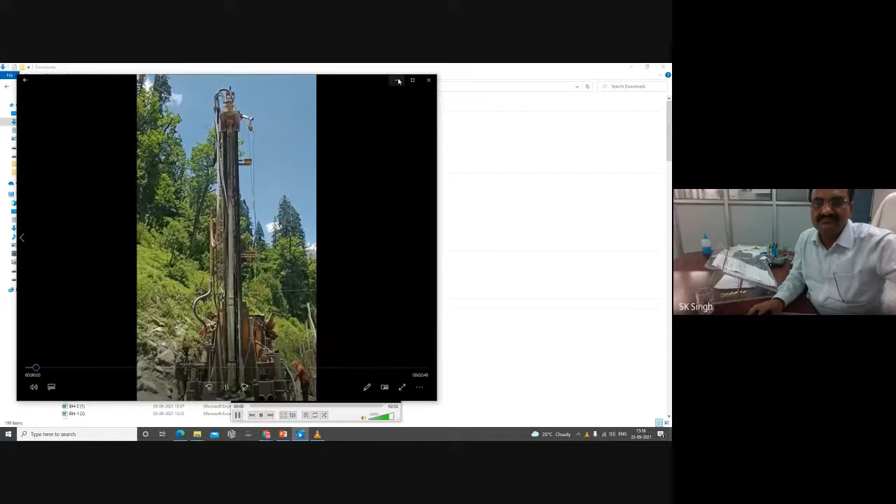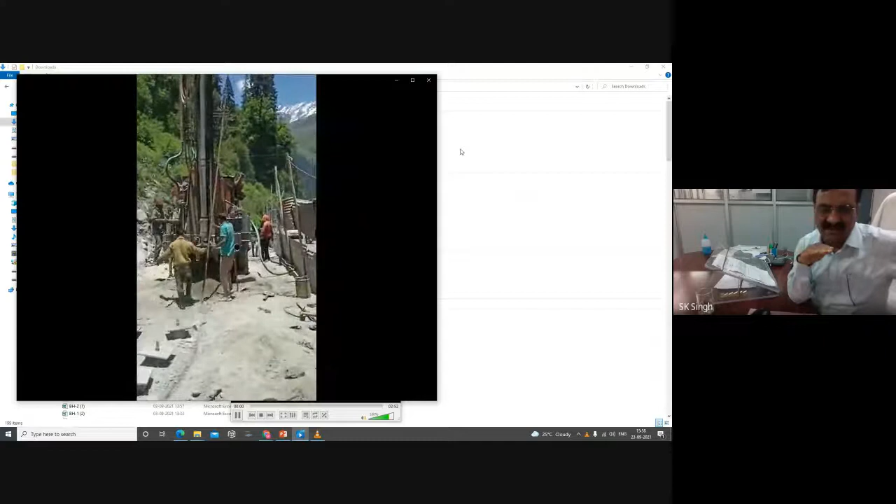That is the actual photograph from the site, MSP. The site is called MSP4.

See, this is the reinforcement that is being put here. See the diameter of that reinforcement.